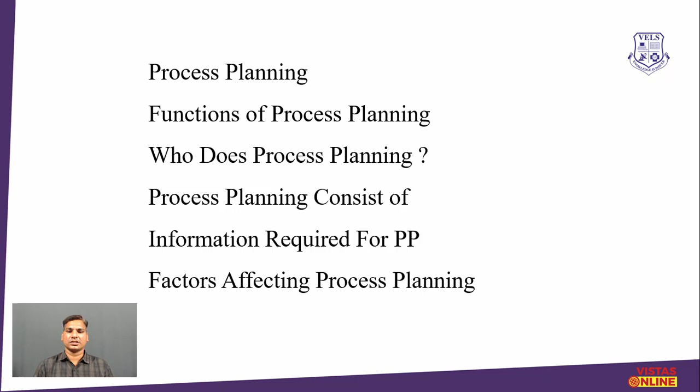Now the first one, introduction about process planning. This is a parameter where companies are able to understand, from the starting stage to ending stage, what steps are there, and at each step how we do an effective process of converting or producing an output. How we are transferring input will be known by the production and operation managers by seeing the process planning.

Process planning starts from input to output. As per the technical term, it is from the designing of the product to completion of the manufacturing product. At the design point, we think about what kind of product we are producing, what is the outline of the product, and we need to think about it from the customer's point of view, as well as the technical and non-technical errors relative to the design of the product. So from designing to manufacturing of the product, everything comes under process planning.

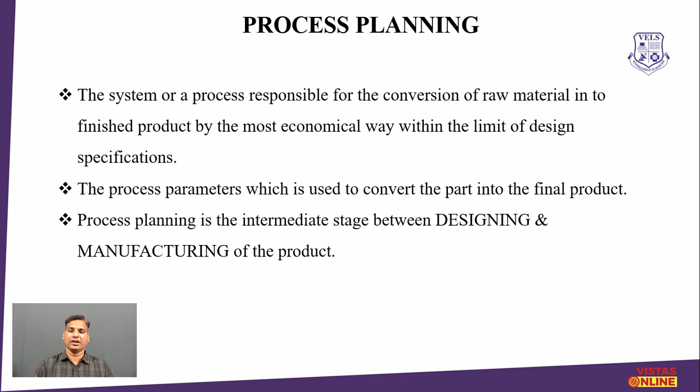Now the first function of process planning: to determine the basic manufacturing process. Each company's manufacturing process may be the same or there may be some differences, but being a manufacturer of a product, you should know the major base points to determine your manufacturing process. By knowing about certain determinations or basic elements, you will be manufacturing the product.

To determine the sequence of operations: manufacturing your product is one task. Another important task is knowing the sequence, where we started, what is the next step, and after that the next step. We should know each step's sequence in our mindset so that there won't be any delay in regular operational aspects.

Being a process planning manager, they will decide and guide in a better way how you have to start and how you have to complete based on one or two events. Once you have completed, you will be thorough and will know very clearly what is the next step or next sequence of operations.

Here we can see an example like a technical guy. Whenever there is a problem in the machine, he will definitely check 4 or 5 important points. If you check those points, you will come to know where the error happened. Here also, in terms of sequence of operations, when you are doing n number of activities for a long time, being an experienced employee, you will know at your fingertips what is the next sequence of operations.

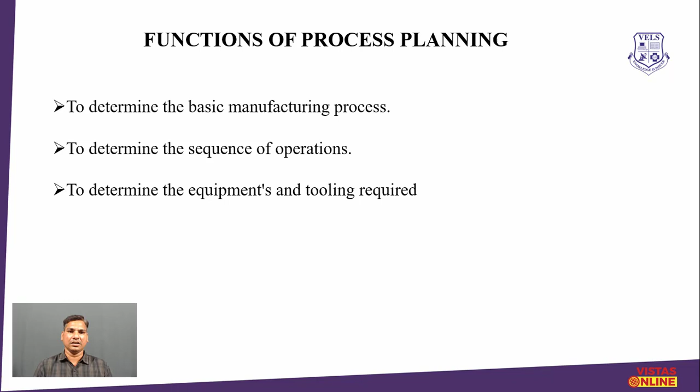Who does this process planning?

Traditionally, or in the current scenario also, each and every process will be appointed one separate manager to monitor each and everything. They will be called engineering managers or process managers.

The process manager, before starting the process, will observe the entire chain of process. If they find any kind of errors or defects, then immediately they won't start the production process, and they will guide the other people to wait for some time until the errors are rectified. Only after rectification of the errors will he permit the production process to continue.

In factories or plants, they talk about engineering drawing. Even for our house we have a blueprint showing where the master bedroom will come, where the car parking will be. In the factory also, a civil engineer draws a picture or blueprint. Based on that, they start the construction of the work, and based on what kind of product you are producing, you arrange the machinery layout in the same way.

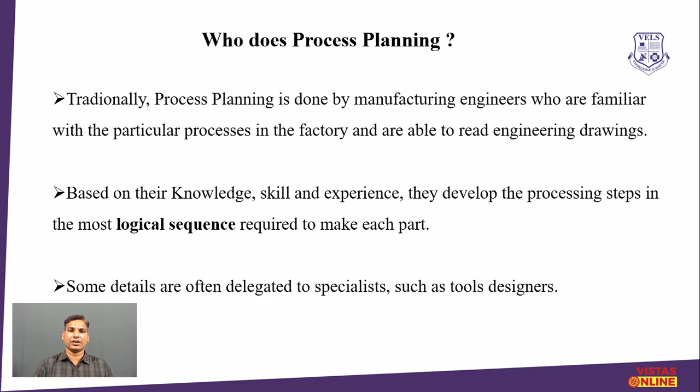Some of these details are always focused on by the process planning delegates, who are specialists in what kind of tools to use for designing new things, because everybody, after some experience, is a specialist in their domain. When they are expert, they come up with new ideas and designs for effective implementation of their plans and strategies. Now we are going to see what process planning consists of.

First, sequence of operations to be performed. We have n number of operations for manufacturing a material into a finished product. All these operations need to be performed effectively. Only then will the production process come out with 0% defects.

Select the proper machines. Sometimes employees choose the wrong machine and expect some other output, but it won't come out. An experienced employee or process planner, when following the process, should know that after machine A you have to use machine B. By knowing the proper arrangement of machines, they won't need to check anything - by default they will move on to the immediate next machine for the next process. So that's how the process planning manager can do it.

Selecting the proper tools. Here the tool may be a machine or a methodology, something they can choose for arrangement of the entire layout. Most errors occur by selecting the wrong tools, and ultimately the production quality and quantity also decrease a lot.

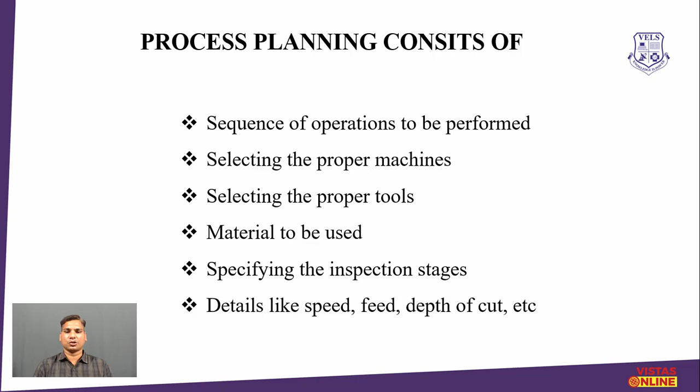Information required for process planning: knowledge of various manufacturing processes. For manufacturing sugar, they follow one kind of process. In the manufacturing of beverages, another kind of process.

Manufacturing of a two-wheeler is another kind of process. For each and every process, the input, processing, as well as output, each and every stage, should be known by the employees. Only after that will they be able to do any kind of experiments on it.

Engineering drawing of the component. Now we are going to manufacture a product, and relatively the machine should be up to the mark. For that, we need to design the component for our safety, and because of good component design, production may increase, showing a positive impact in the market. Many other reasons will be taken care of by a small tool or component also.

Knowledge of various tooling and fixtures. Everybody will be talking about only the manufacturing of the product, but selecting the right tool gives value addition to the existing product.

Relatively, cost elements also need to be understood to minimize raw materials. This is an indirect but important planning element for the organization, because when raw material cost is low but you are producing more product, or sometimes because of damage to material, the quality of output will not come, and it may damage the machines directly or indirectly.

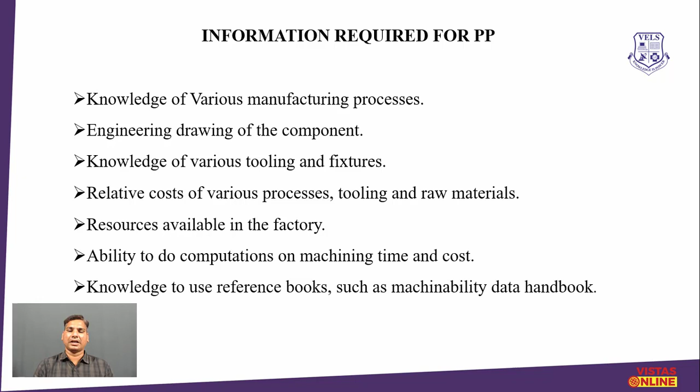Knowledge to use reference books such as the machinability data handbook. Everywhere there will be a user manual for the usage of the product for customers, and a user manual for the employees who are working with the machines. Definitely they will operate more effectively with the help of studying the user manuals.

Next, factors affecting process planning. When you follow good process planning, your production method is also important - what kind of method you are following for production, like piece-wise, time-wise, or any other method, that should be known. Not only knowing the method, but also knowing what kind of tools and machines you are using at the organization will definitely influence your manufacturing of the product.

Size and type of raw material. What kind of material you are using for manufacturing your product matters - if it is a cheaper grade material, then cheaper products will come out. Sometimes this may also damage your machinery.

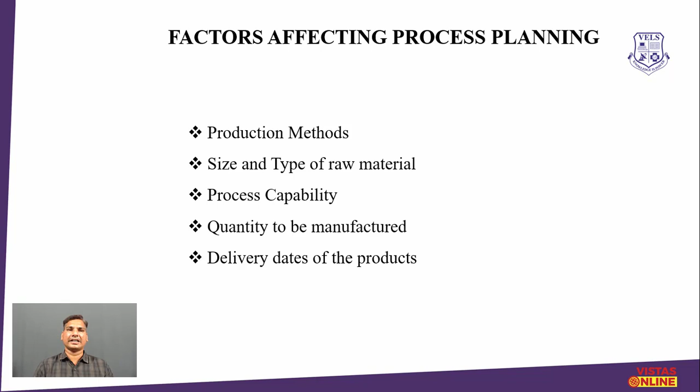Process capability - here we should know how far this will succeed, and what kind of changes are required that can be done by the companies, along with quantity to be manufactured and delivery dates of the products. These all directly or indirectly influence your process planning. Thank you.